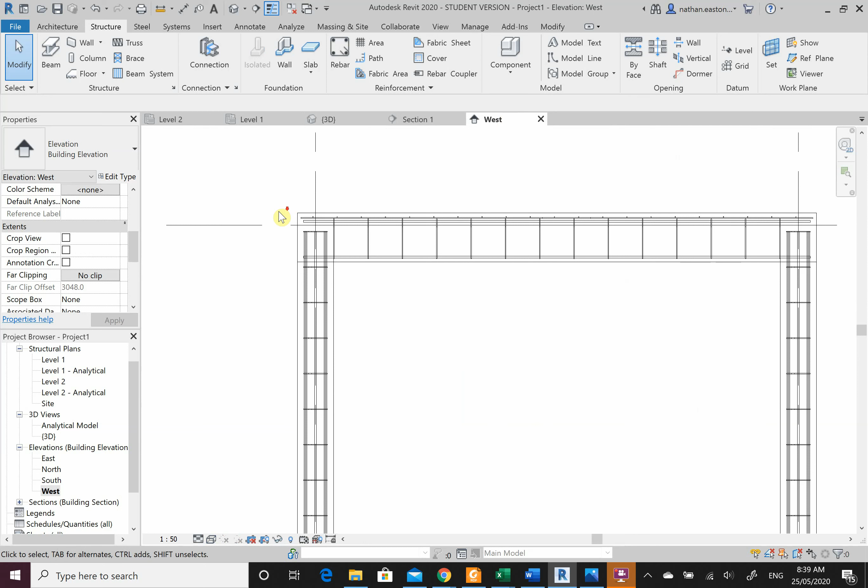So I come to my west elevation. I've changed the scale here to 1 to 50, and I've hidden a section that I have running. So I'm going to zoom into a corner, and hopefully this will make sense as I draw it. If I go rebar, what I'm after is an L-shaped bar. It's going to run through here and then down to tie the two together. Now here it's not letting me. Okay, I get just this flat L bar in the opposite plane.

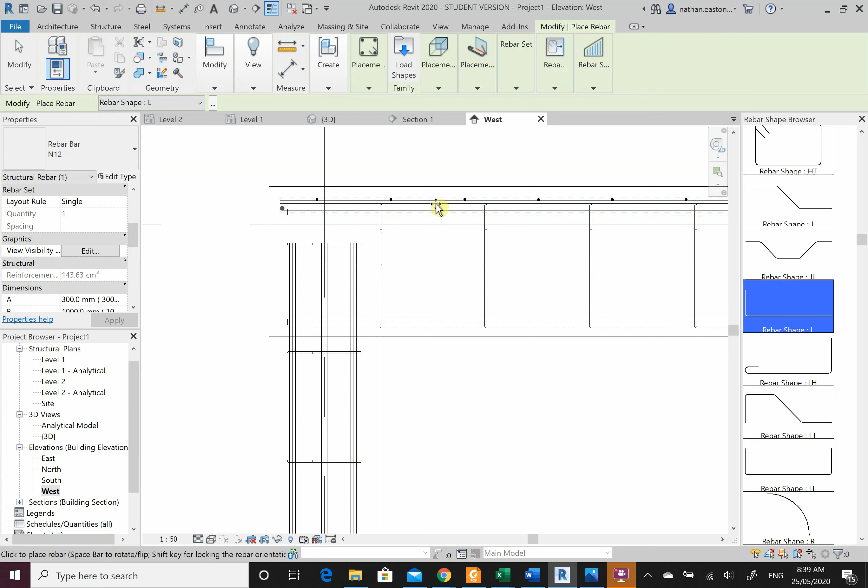So what I'm going to do is create a sketch. I'm going to click the host of the column. Now I know this is where my beam is. This is where my column is. So I want to work out a way to get 450 away from here. So I can go 450 plus the thickness of the beam is 750. So I can come down 750 from the top.

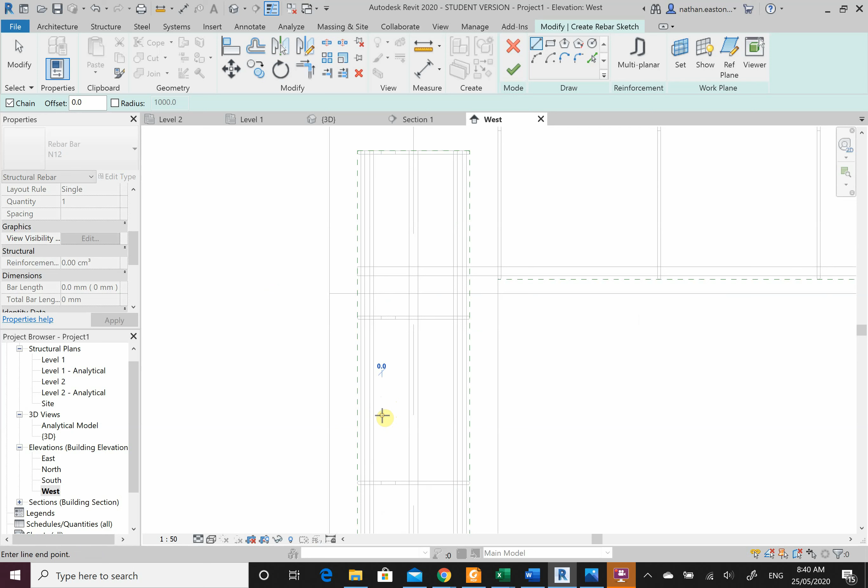There's a few different ways that we can do it, but for now I'm just going to free sketch to here. I'll then come up 500. I'll then come across 500. This isn't very accurate, please bear that in mind. We're just learning how to put these in for now. Enter. Escape. Rebar. I'm going to use N12s. Okay.

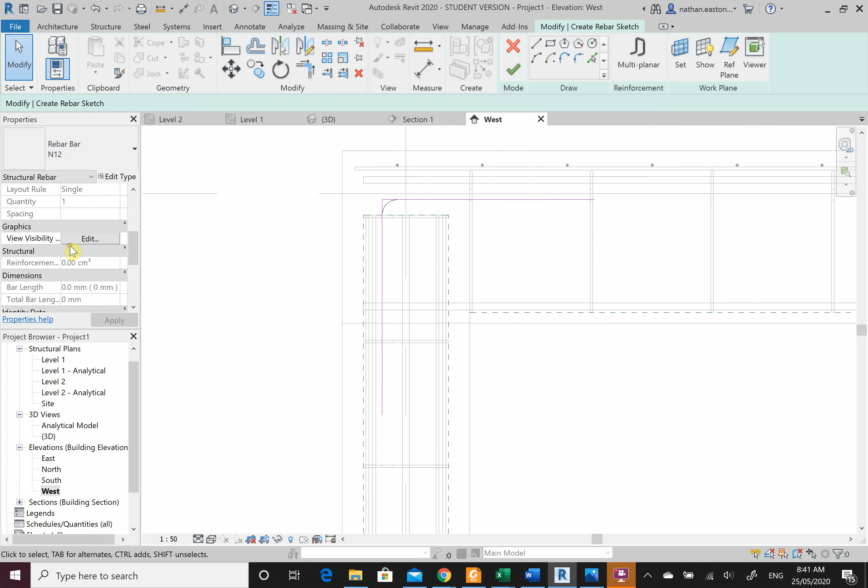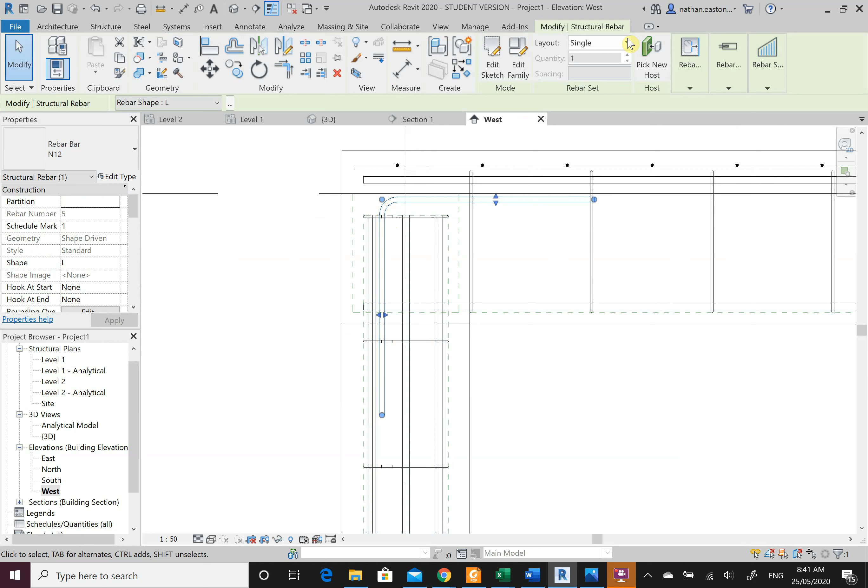I might change visibility here. Make it unobscured and view as a solid. Go OK. We can put marks and comments in later. Click the green tick. So what I've done is I've modeled in this cogged bar here. Now the next thing I can do, if I click on it, I can say maximum spacing. I'll leave these at 100 mil or even 150 millimeter spacings. Again, this is just for the purpose of learning how to put these in.

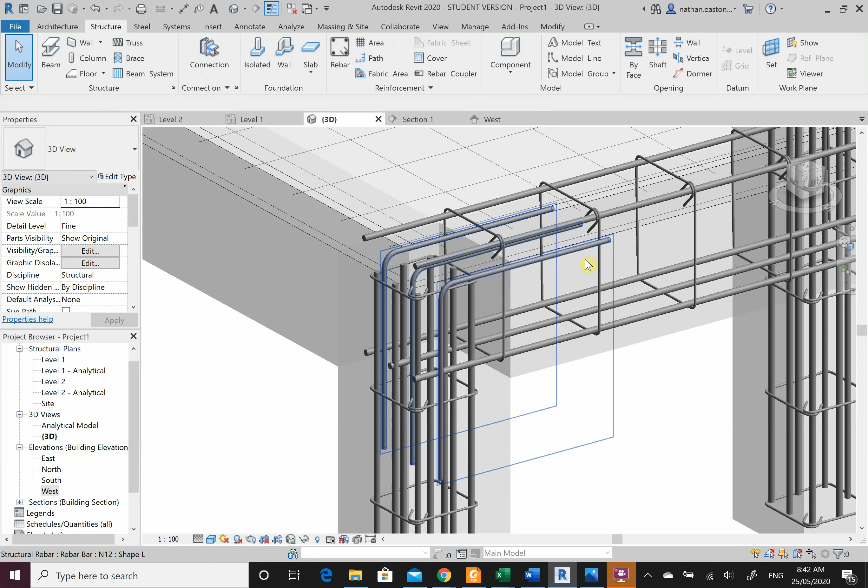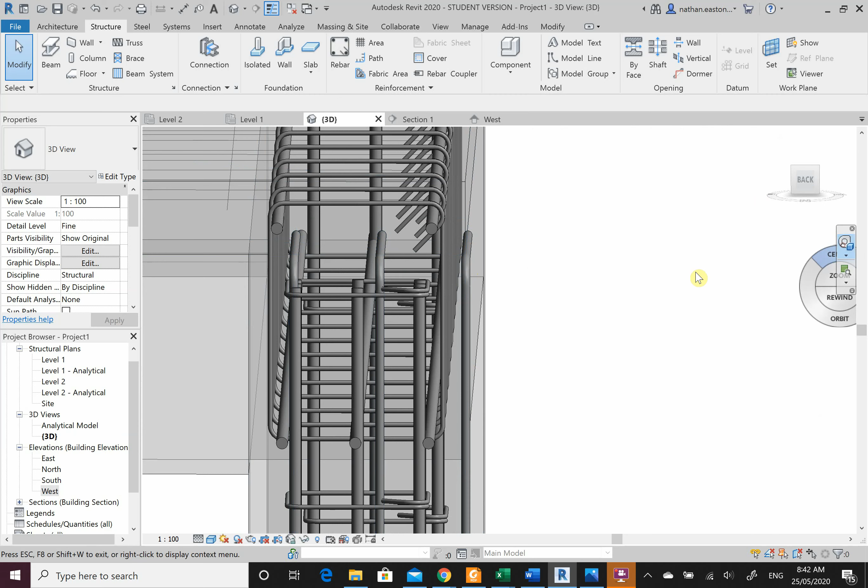If I come to my 3D, these are the bars I've put in. 1, 2, 3. They're cogged down, and they tie both the concrete beam and the column together. Now I'm going to make sure that they are actually lining up and I haven't got steel floating, which I do. I have this steel beam reinforcement sitting outside of my host. So I'm going to fix that up. It's taking the face of the column. So I need to make sure that these are still inside of the cover requirements.

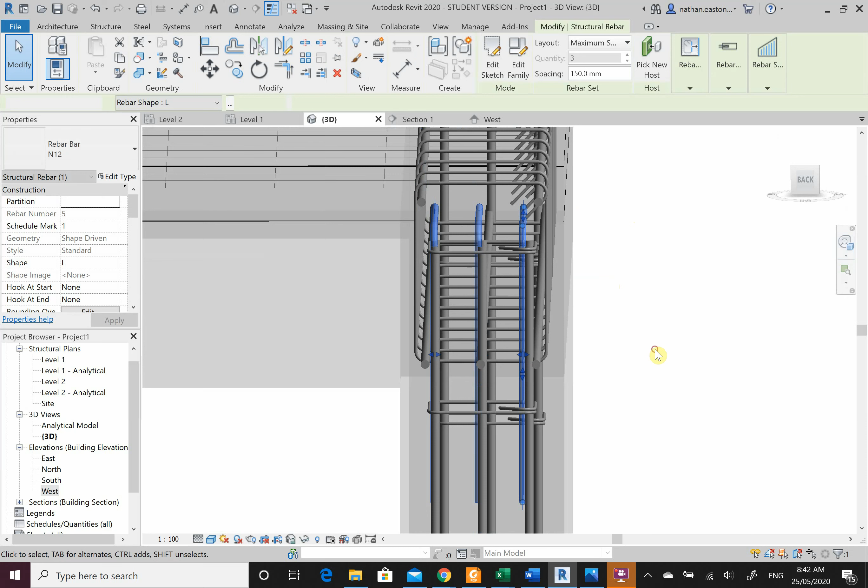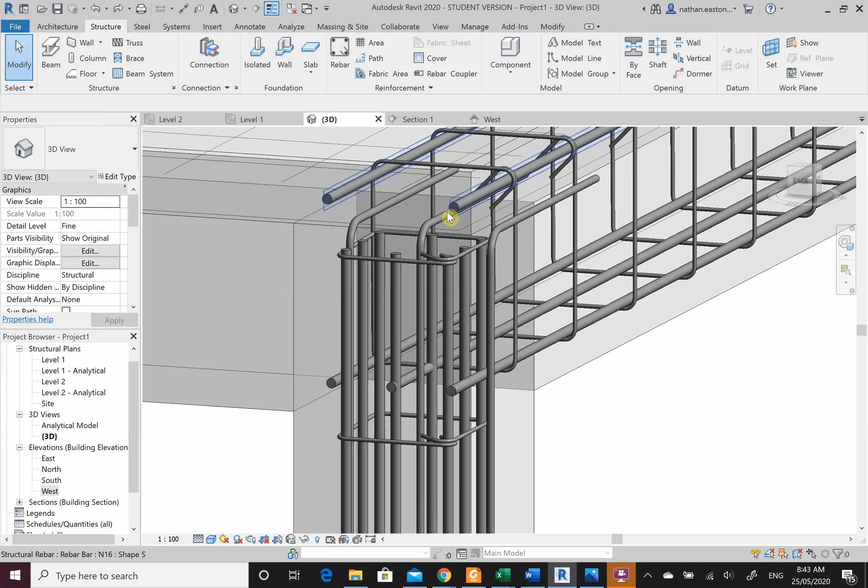So I can move it across if I have to. And same with this one. So tab will allow me to select it, and then I can move it again. I can just delete that one out the middle. Just gonna undo that. There we go. Oops, sorry. Before I went one too many.

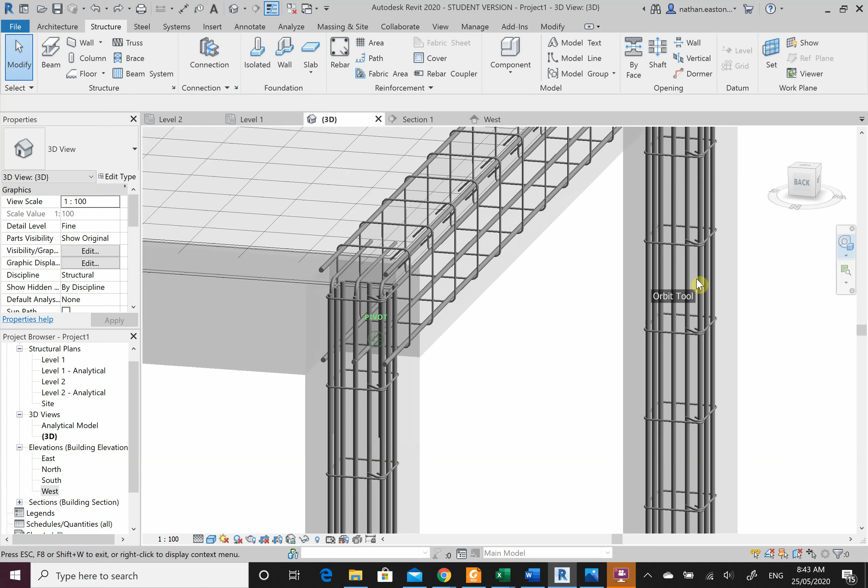Okay. So this is how we can model in different rebar shapes. I can put loops on them, I can do whatever I'd like. We just have to make sure that we tie them in. So please take notes as to how we can put in these different shapes or these cogged beams.

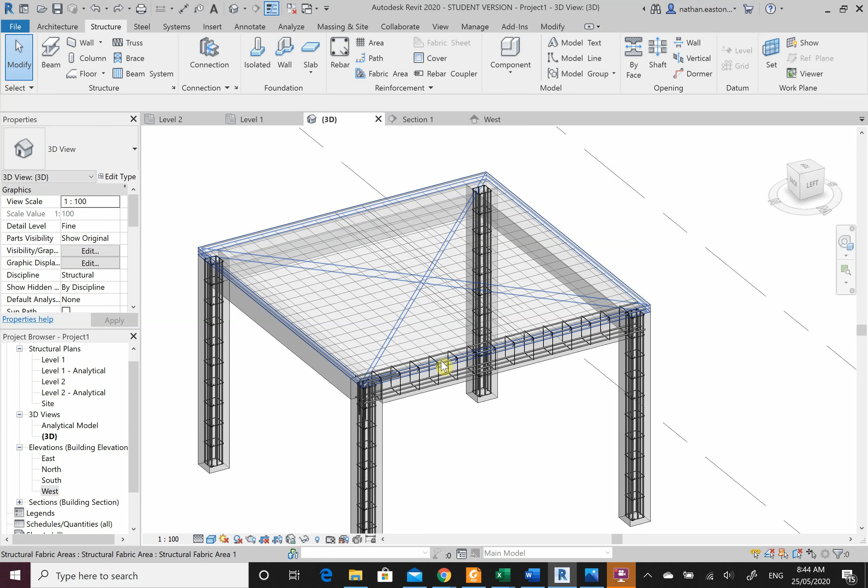The next thing I need to show you, and please make sure again that you're taking notes of all of this, is how to create a customized beam. So I have some edge beams here, but I might have a band beam running in the center, spanning from supports. So I need to be able to create that. Just like our internal footings for a house, we can create those beams.

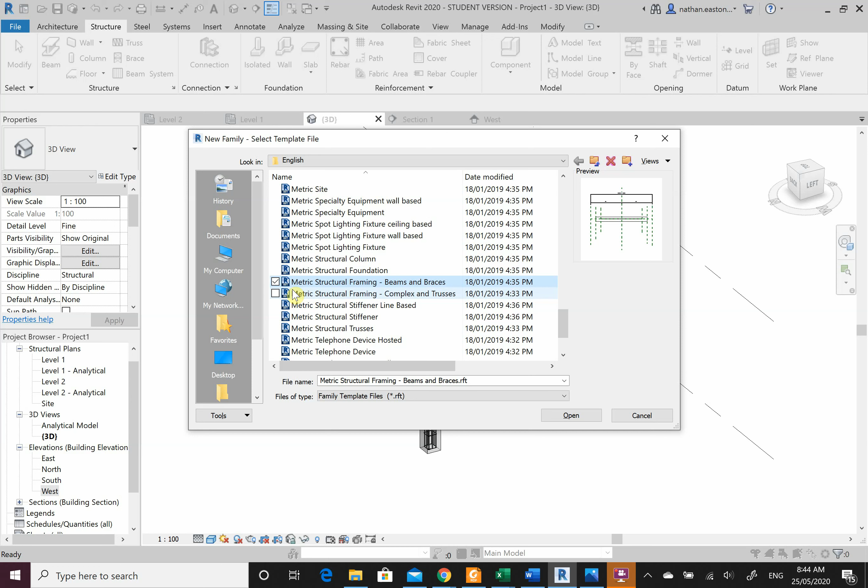So what I need to do is File, New, Family. This time what I'm after is, when we draw our concrete beams, they come out as framing elements. So metric structural framing beams and braces. Go open. Now this here is just our stock standard family properties for our beams, or for our bracings and framing elements. I come straight away to one of my side views, so either my left or my right.

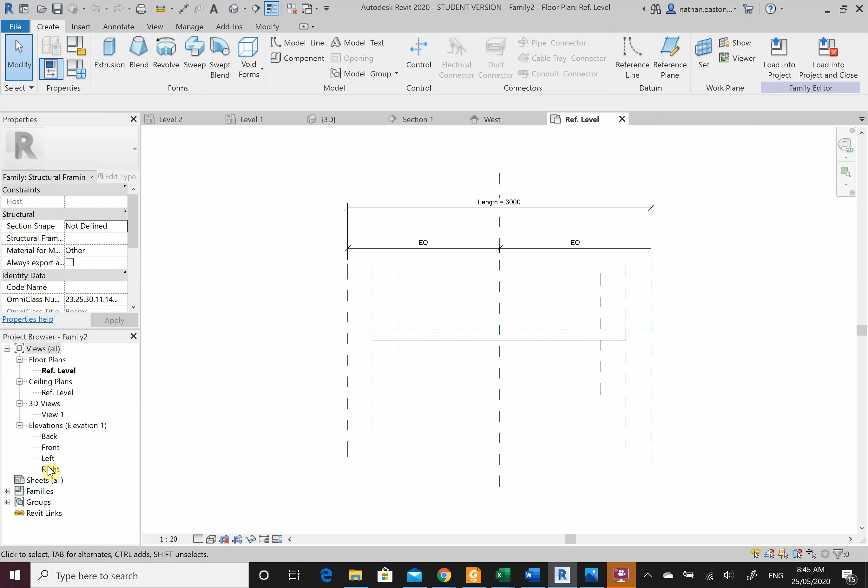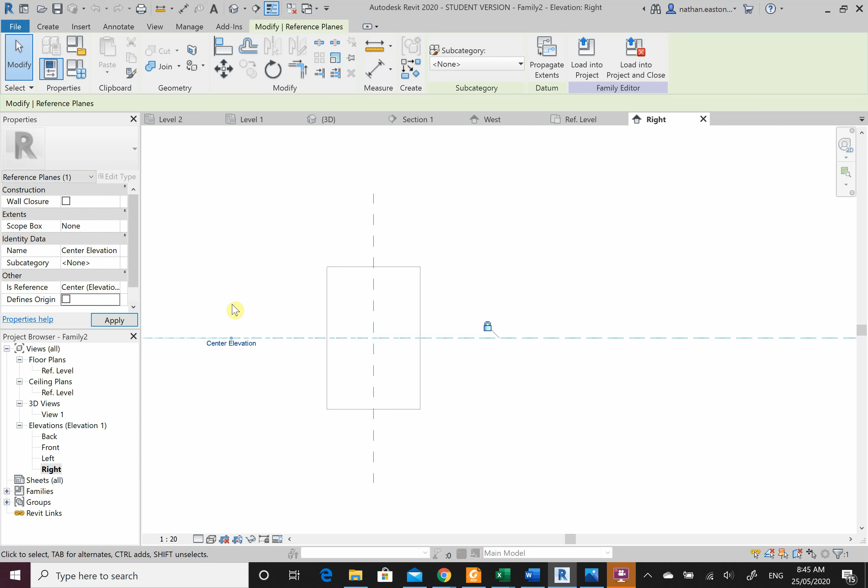And what I can see here is this is representing just a square block. So if I select it, I want to start changing some things here. But before I do that, I want to click this dashed line. Okay. I'm going to untick this defines origin, because I don't want my origin to be at the center of my mass anymore.

Now what I'm going to do is click on my extrusion, or the rectangular block, and go edit extrusion. Now this can be a bit tricky, but these reference planes, we need to have them in here. I guess you can look at them as the constraints of our framing. But to the core of Revit, this is how the families have been created, especially our angles or our steel beams, our concrete beams and everything else.

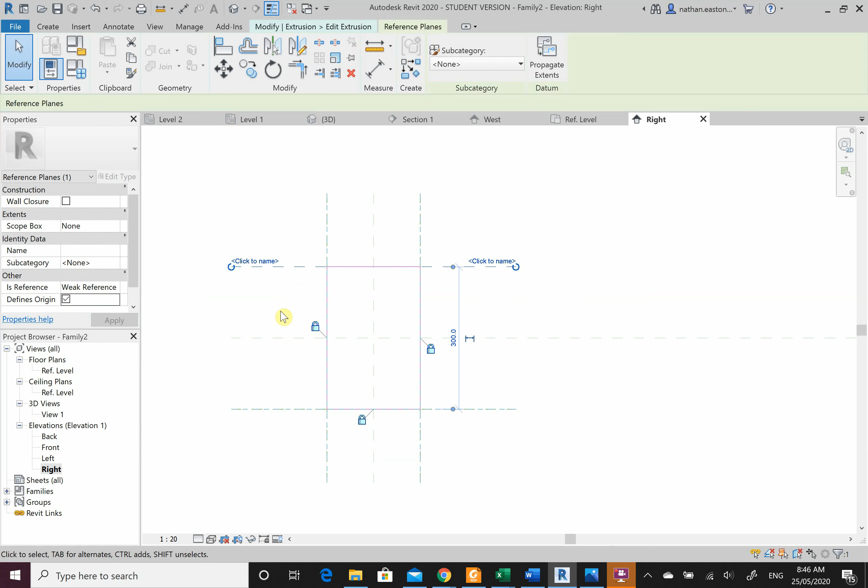Alright, so I'll show you a way to recreate this beam or a concrete beam, and simply as we go through, depending on what beam we want, we can modify and recreate new ones. So what I'm going to do first is this top line here. I'm going to go defines origin. Then I'm going to go right click, create similar, 100 millimeters down to here.

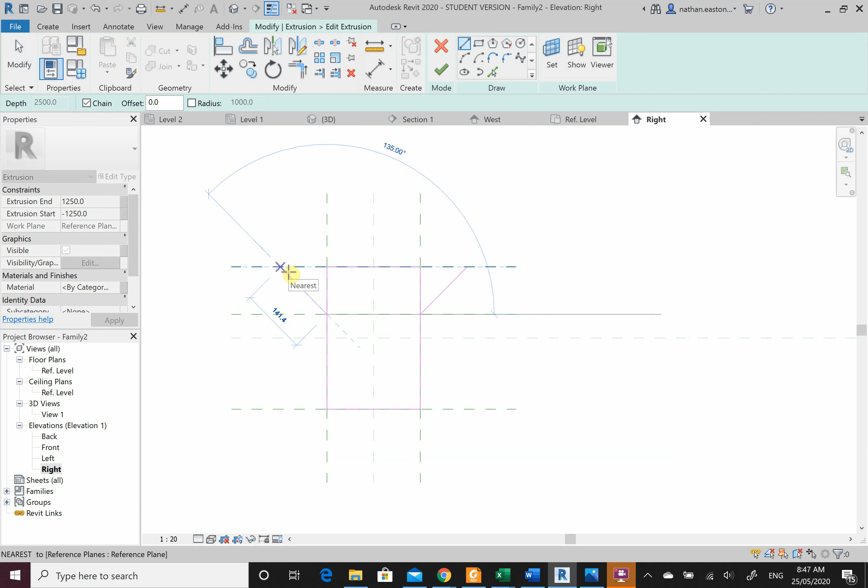Then I'm going to draw a line at a 45-degree line to here, escape, another one at a 45-degree line to here. Okay, and then I'll just delete this line here, move these down, and then draw another line across. Okay, so this looks a lot like our internal footing. But we're going to change some of the parameters and stuff in a minute.

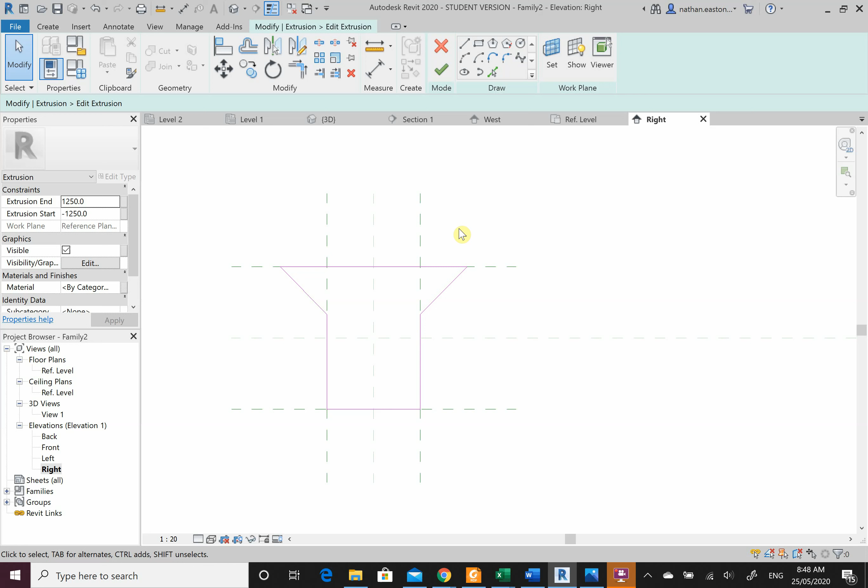So the next thing we need to do is I can delete that reference line. I need to lock in some parameters. What I mean by that is if I load this into Revit, this is going to be fixed at this size. I want to be able to make it so when I go edit type, I can select a depth and a width. We can specify another one up the top as well. So I go measure from top to bottom, and the width of my bottom. The other thing I want to make sure is that from this dashed line, if I increase the size, it's even on both sides. So I take this measurement here.

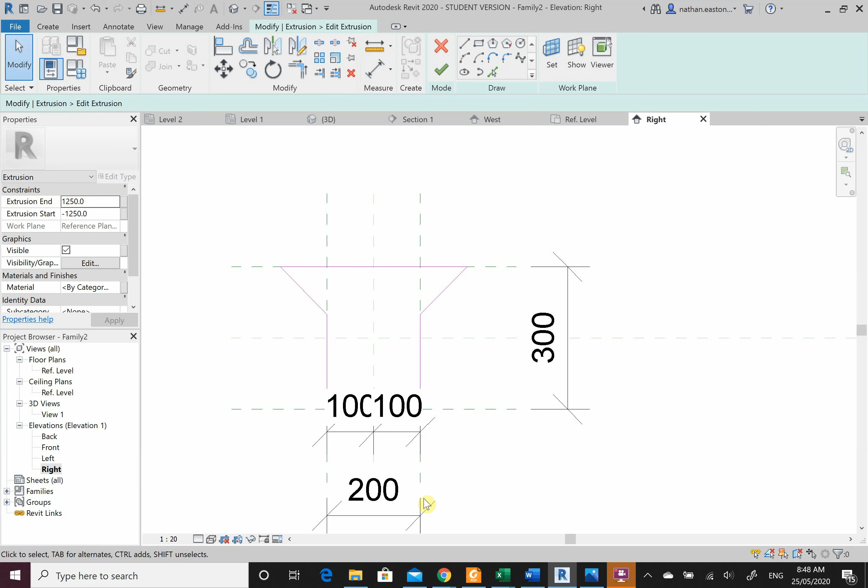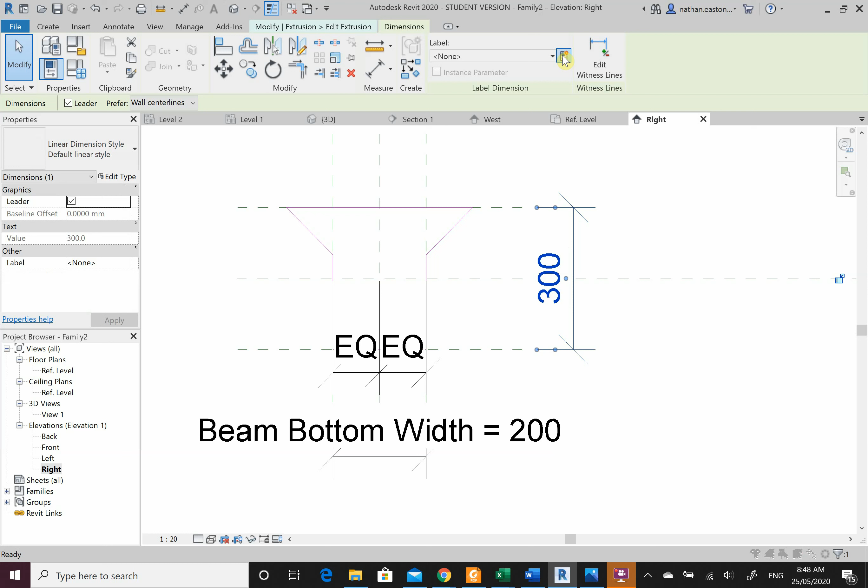So first thing is I click on this one and make it equal. Second thing, I click on my bottom measurement and up in here I go create parameter, and this is going to be my beam bottom width. Go OK. Then this one here, add parameter, beam depth, and go OK. If you want, you can do another one from the top here. So now my depth and width and my equality has been locked in.

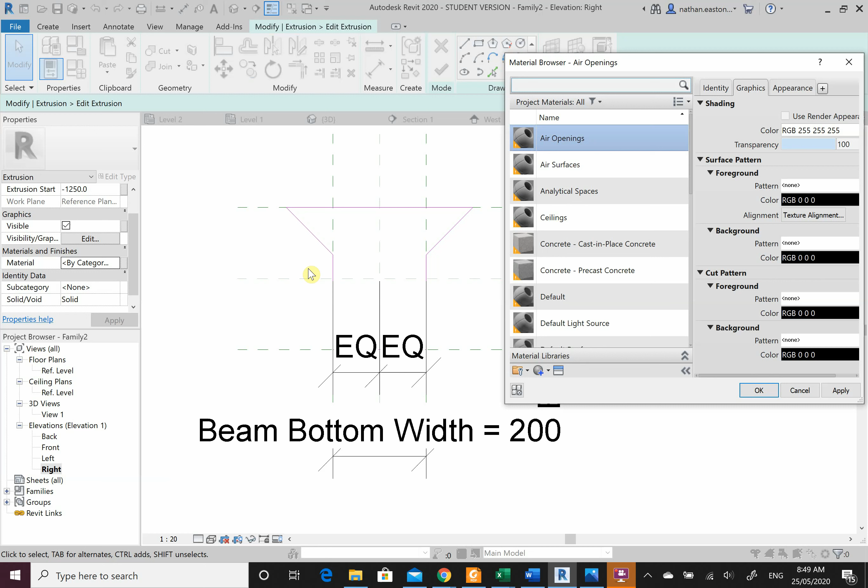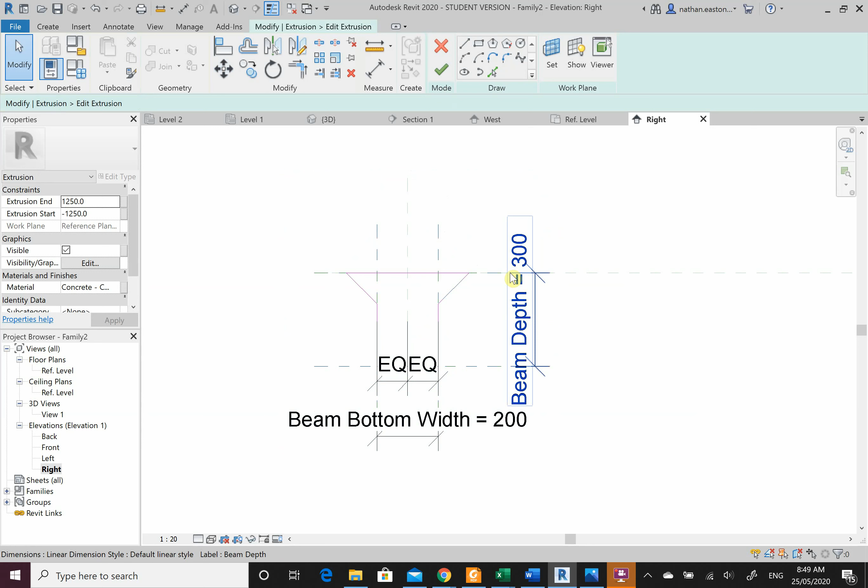I'm going to make my material concrete cast in place, so I can specify it later. Okay, click the tick. Now the next thing I'm going to do, come back to edit extrusion. Now I'm going to select all of this here, move from the top to this center line here. You'll see why when we put it into our model that this here is going to act as the top of our slab. Click the tick.

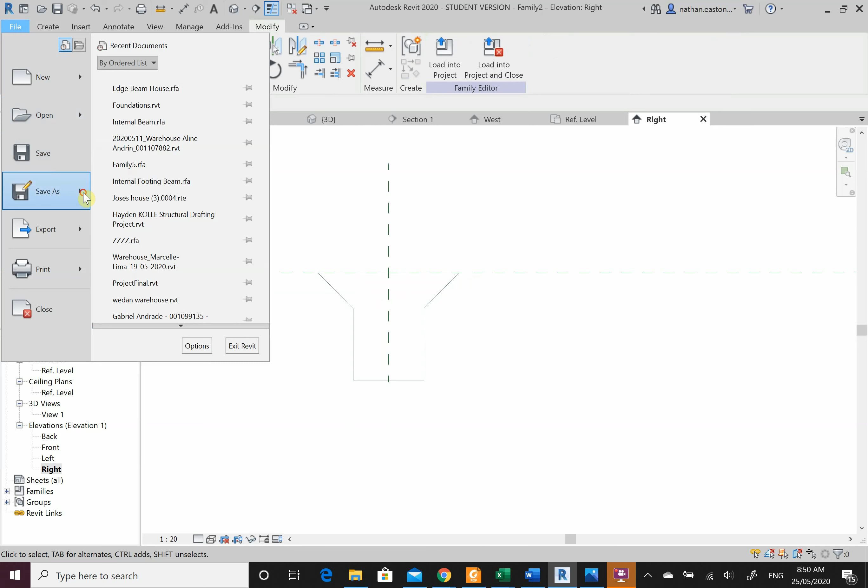Okay, and then from there I can load this back into my model. There's nothing else I have to change in here. So file, save as, family. This is going to be our custom beam. This also can be your internal footing. I use the same beam. Go save. Loading the project.

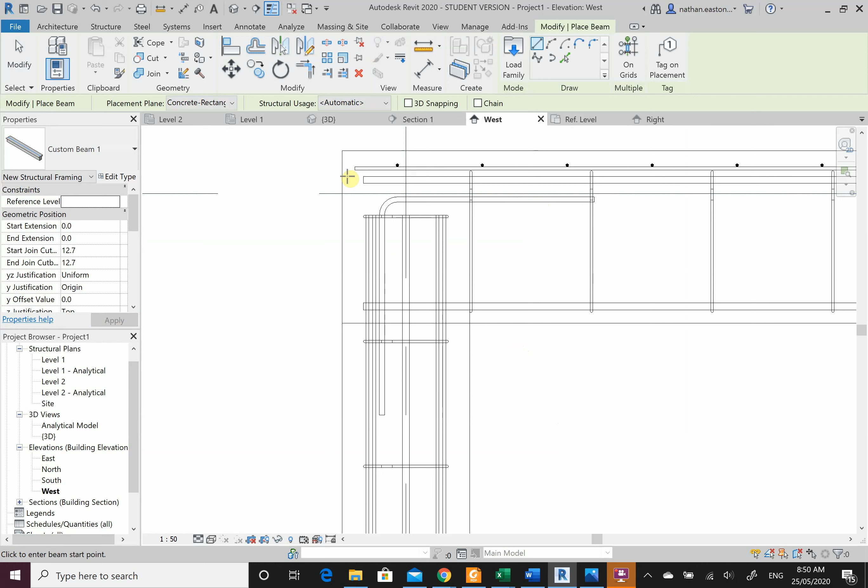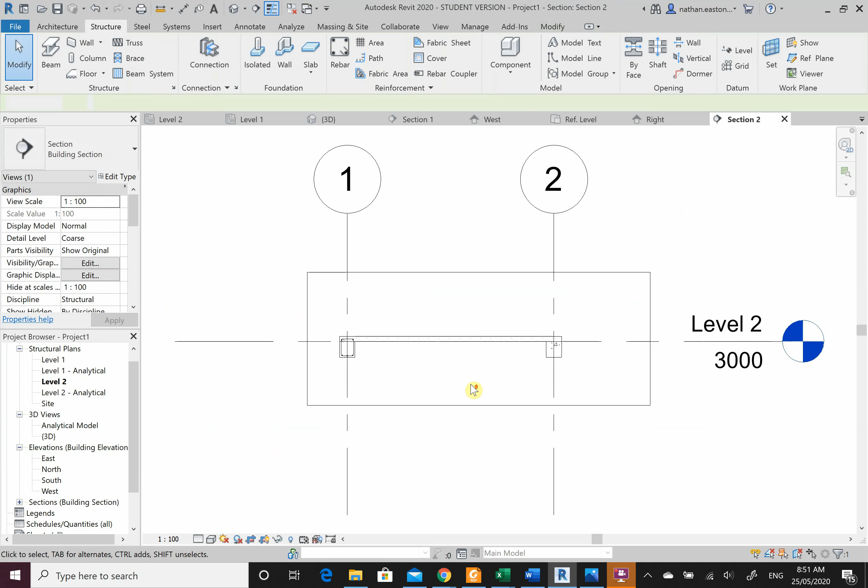Okay, so now if I come to my level 2, which is where my slab is, I can draw one from here to here. I'll take another section, it's probably easier. I'll take a section through. Go to view. Okay, now I can't see it at the moment. What I haven't done is I haven't specified to show me this detail at a coarse level. So if I change to fine, it will come in. Shaded. Okay, so now I have a new beam sitting in here.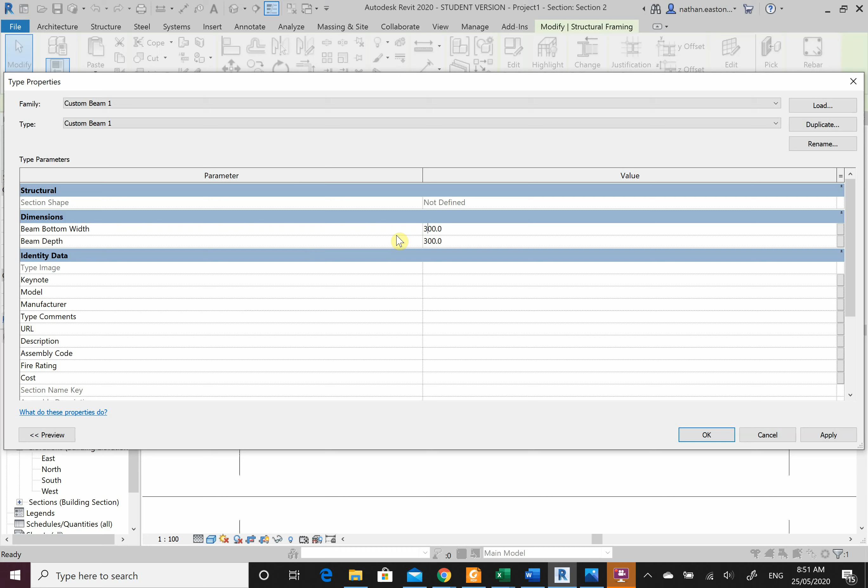Alright, so that's how I can create this new beam. Then I can do whatever I like with it. I can put rebar in it, I can move it, I can change concrete grades on it. In my edit type, I can change my depth to 300, my beam bottom width to 300, go OK, and that will make my beam wider. So that's why we set these parameters, so I can model and change around this beam. I have all my rebar cover settings in here now. So it's just like a normal beam. That's how we recreate them.